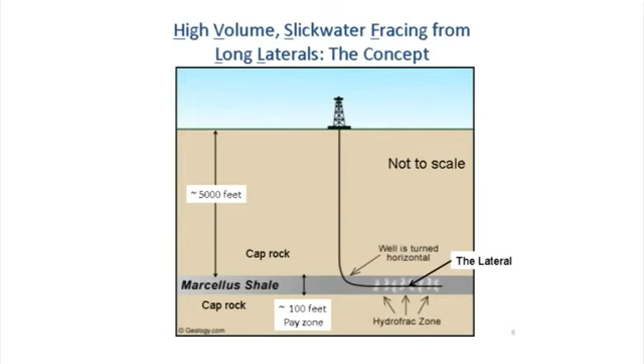The inventory is where you have your product. The product of a gas operator is gas. The inventory is everywhere, therefore you have to go everywhere to get it. Got that? So you can see why directional drilling is important because of the geology. The shale layer is thin, and because of the way nature put the gas in the shale, it's everywhere.

Go back to the second technology: high frac fluid volumes. Conventional gas wells typically use less than 100,000 gallons of fracturing fluid. Now, for those of you who don't know anything about fracturing, you might think 100,000 is a big number, but as we proceed tonight, you're going to see 100,000 is a very small number, unless it's the amount of money in your checking account. So high volume in New York State is defined as anything over 300,000 gallons.

And as you'll see later in the talk, typically for unconventional shale wells, we're talking millions of gallons of frac fluid. Why? Well, because we can drill through a mile and a half, or 2 miles of shale, we have a really long well. The well could be 3 or 4 miles long. Just to get all that fluid down there takes a lot.

Fill up a pipe that's only 6 inches in diameter that's 3 miles long, it still takes a lot of fluid. But you're trying to create and recreate many fractures. Let me show you a picture of what I mean.

Okay, up in New York State we have lots of gorges. You've all heard the phrase 'Ithaca is gorgeous.' Or 'gorges,' which one is it? It's both. If you walk through any of the gorges around Ithaca, you can see exposed shale layers, including black shale layers.

So this is a picture from the bottom of a Taughannock Gorge, and this is a black shale layer. You'll notice those are natural fractures; they're called joints. The geologists would call them joints. They're really fractures that have occurred because of natural geological processes.

Fluid, liquid or gas, does not want to flow through that rock very easily. In fact, it might take a molecule of gas in the middle of that block years to get to the nearest crack or joint. But since it's been down there for 390 million years, a lot of that gas has gotten to those joints. So most of the readily available gas in the Marcellus is not in the Marcellus, it's in the joints in the Marcellus, because that's where it wants to go.

So another misnomer, another myth: hydraulic fracturing is not fracturing, it's refracturing, because there are already fractures. The purpose of hydraulic fracturing is not to create new fractures, it's to open up the existing fractures. Why? Because that's where the gas is.

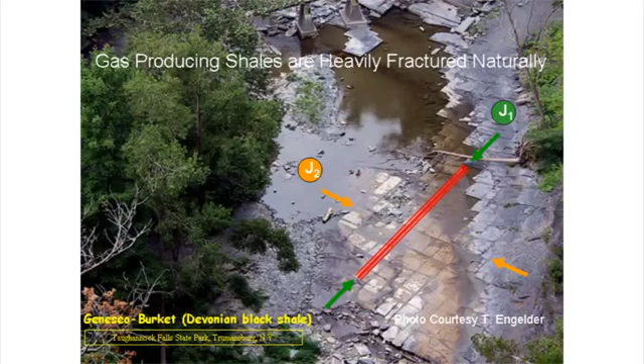Got it? Okay, so why do we need high volumes? Let's put our imaginary 1.5 mile long lateral. How many of these joints are we going to intercept if there's a joint every 2 feet? Thousands of them. And how much fluid do we have to put in those joints to open them up for hundreds of feet in each direction? Even though we're only opening those joints, how much are we opening these joints? Are we creating cracks this wide down there?

This wide? A little bit more than the diameter of a grain of sand. But when you've got acres and acres of cracks open the width of a grain of sand, it takes a lot of fluid. So the second technology that had to be invented was the ability to bring to a site high volumes, to store high volumes on a site, and to inject high volumes.

That takes a hell of a lot of horsepower. Again, there's one of those engineering words, hell of a. Okay, thousands of horsepower of pumps. This is not your pressure washer for your deck, okay?

We're talking thousands of horsepower needed to pump those high frac fluid volumes down 2 or 3 miles along a pipe that ultimately is only the casing, the production casing, the stuff that's down there on the lateral through which the gas is going to flow back. What's the diameter of that pipe? 4 to 6 inches. Okay, so here we go with my favorite analogy.

Garden hose. You connect your garden hose to your faucet. Is the rate at which the water comes out the end of the garden hose the same as the rate at which it comes out of the faucet? Yes or no? No. If you make your hose long enough, what comes out the other end? Nothing. Why? Friction. So there's pressure loss and flow loss as you're trying to force a fluid through a hose, just like there is as you're trying to force a large volume of fluid, millions of gallons, through a 6-inch diameter pipe over 3 miles at what pressure?

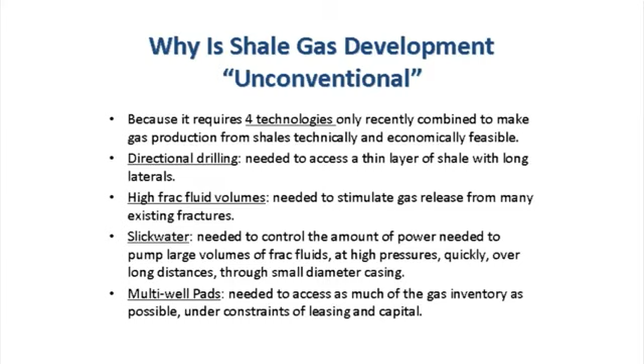Fourth technology, multi-well pads. A pad, as you know, is an area where there is drilling and fracking going on, a number of acres that have been cleared and industrialized.

Conventional wells typically have one well per pad. Why? It's all in the geology and how the gas is stored. Why do you only need one well on a pad? Because it's either down there or it's not. It makes no sense to drill one well here and then move 10 feet away and drill another. You might want to move a mile away because you missed, and you got a dry hole. You thought there was gas down there, but you didn't get it. But where's the gas in the Marcellus?

Everywhere. So if you're going to go through the effort of clearing an area and setting up shop with heavy industrial activity, why not drill another well in that direction, and then move 17 feet and drill another, and another? Do that until economically you say, I've gotten the most out of this one pad, I'll move on to another. So drilling more than one well from a pad is dictated by the geology, the gas being everywhere, and by economics, and controlled by whom?

Gas companies, and DEP, and who's leasing the land? You all. So if a gas company wants to come and put a pad here and drill 8 or 9 wells that way, and 8 or 9 wells that way, that's going to be a pretty big pad, and it's going to take up a lot of land underground. It's going to drain a large area, square miles. And they have to have permission from landowners to do that, or they have to not get permission and still do it, depending upon the laws of the land. It depends whether you're in New York State or Pennsylvania.

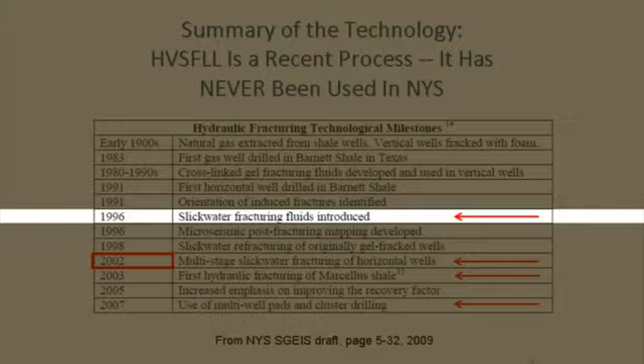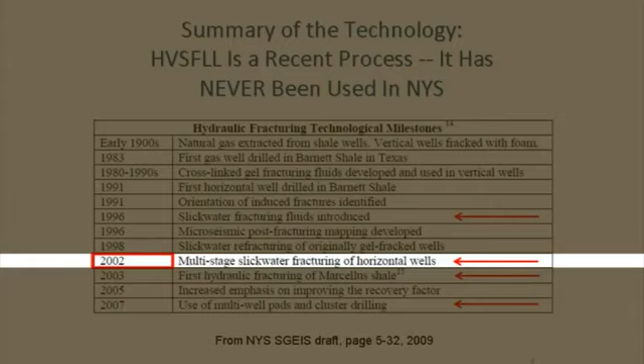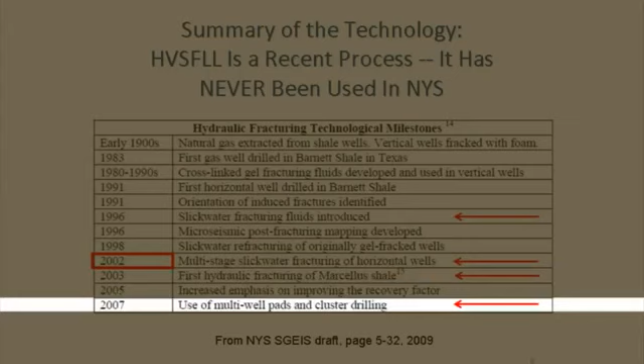Slick water fracturing fluids were introduced in 1996. That's not 1947 - that's a myth. We don't frack Marcellus wells with traditional fracking materials. Gel fracking, gel gas fracking, sometimes hybrid fracking, yes, but usually slick water - not always, but most of the time. Multi-stage slick water fracturing of horizontal wells - combined slick water, high volume, in a horizontal well - came in 2002, down into the Barnett. The first hydraulic fracturing of the Marcellus Shale was in Pennsylvania, 2003, Washington County. And finally, use of multi-well pads and cluster drilling, Pennsylvania, 2007.

So this is all relatively recent. A myth the industry repeats is that we've been doing this for millions of times, over 60 years - what's the hubbub? The hubbub is it's relatively new technology. You're still inventing it, still evolving it. It's still an industrial process that has yet to reach a steady state operating procedure, because every well is going to be different, every formation is going to be different, and capital and leasing control what they do.

This is going to be a constantly evolving technology. This will never be a technology where a building goes into your industrial zone and you build toasters - the same thing over and over again. It's constantly going to evolve because that's what Mother Nature is going to force the industry to do. All these were natural evolutions in response to geology and gas distribution.

Got it? Now we know what we're talking about. Unconventional gas development: large volumes, very large volumes, 100 times more than previously used. Multi-well pads, horizontal drilling, and it's necessary to add different chemicals to the fracturing fluid than used before, because of the requirements of that massive hydraulic fracturing process. That's what the hubbub is about. Now we're all saying, is that new technology safe enough for us? Are the risks acceptable, because it's a new technology?

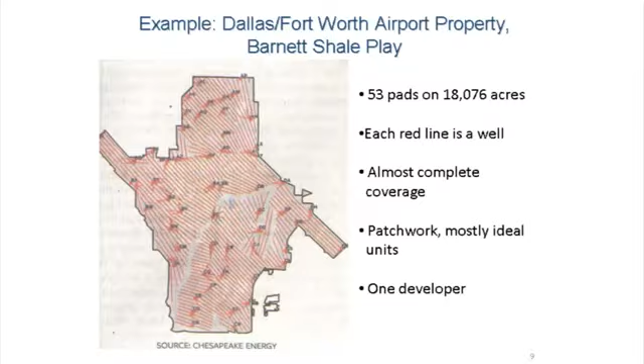I told you a few minutes ago I'm going to show you what the technology is evolving towards, because I'm going to repeat this again and again tonight: the technology is not steady state. There is no standard operating procedure. You won't find a book right now that says how to develop an unconventional gas well in the Marcellus in central Pennsylvania—that book is being written, chapter by chapter, and every well adds another couple pages to each chapter. But the experiments are where the industry looks to see the experience of the future: how can we make this operation work better, how do we get more gas out for fewer dollars down? That's the bottom line—from a corporate point of view, more gas out, fewer dollars down, higher profits. That's good.

This used to be the world's largest frac job, in April of 2010. This year, in April, this was announced as the world's largest frac job. It's in northeastern British Columbia, where there's a big shale field being drilled substantially. Gas is going to be piped to the west coast of Canada, liquefied, and sent by ship across the Pacific to sell to the Far East. Good business—16 wells on that site.

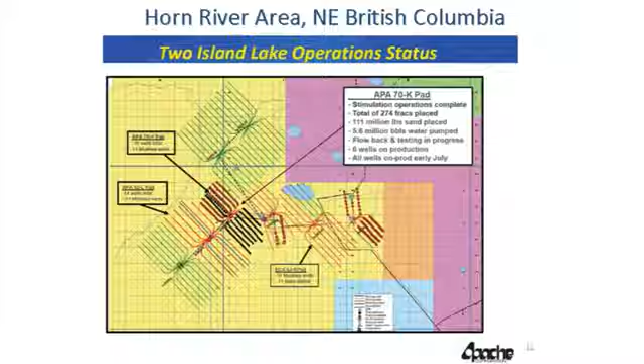Okay, so I'll give you some statistics. Here's that pad right here—there's 8 wells going northwest and 8 wells going southeast. Why do you suppose some wells go northwest and some go southeast? Why didn't they go north-south? Natural fractures—you want those wells to cross the most natural fractures because that optimizes your production. So that tells you the direction they're going.

What controls how far they drill those laterals? Lease controls and economics. It costs a lot more money to drill a 2-mile lateral than a 1-mile lateral, and if you're not producing much gas from that lateral, you might choose not to go 2 miles—or maybe you choose to go 2 miles to produce more gas. It's complex formulas. But look at the numbers.

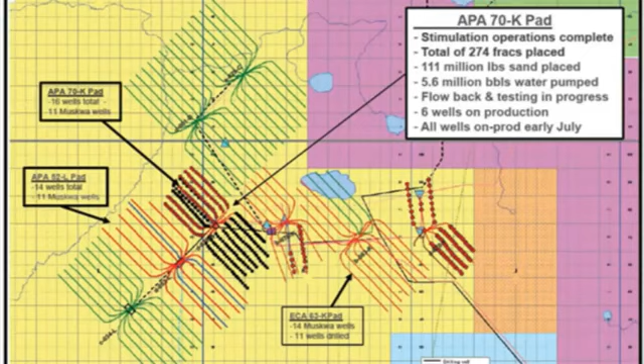To get those 16 wells fracked—every one of those dots is a frac job. You don't fracture the entire lateral at one time; you fracture in intervals, as we'll see in the movie in a few minutes. So there were 274 individual frac jobs involving 111 million pounds of sand and 220 million gallons of water. That was April of this year. November of this year, Encana—that was Apache, by the way.

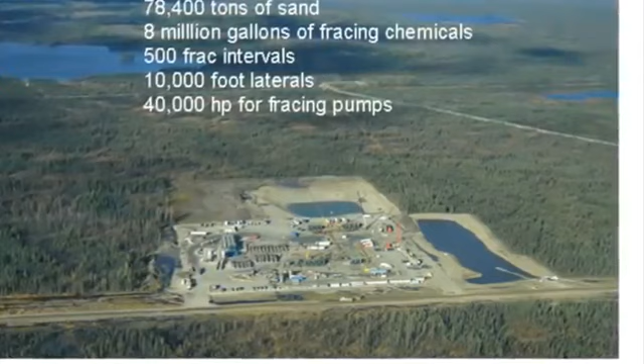In November of this year, Encana bragged on its website and to its shareholders that they now had the largest frac job in the world. Also in northeastern British Columbia. This is a square kilometer. Here's the frac water holding pond, here's the flowback holding pond. 417 million gallons of water, 78,000 tons of sand, 8 million gallons of fracking chemicals, 500 frac intervals, 2-mile-long laterals, and 40,000 horsepower of pumps.

What's another difference between conventional gas and unconventional gas development? You've heard it before. It's heavy industrialization. It took 111 days to complete that frac job - that's a third of a year. 40,000 horsepower running 24/7 during those 111 days. That's a lot of noise and a lot of air and light pollution. And how do you get 78,000 tons of sand to a place?

It's not a sand fairy. It doesn't come by helicopter. It comes by truck. You count the number of truck trips. How do you get 417 million gallons of water to that lake? Truck. Or if you're lucky, if you have another pad nearby, maybe that lake is serving two of them and you've got a pipeline between them, but somewhere you've got to go get the water to put there.

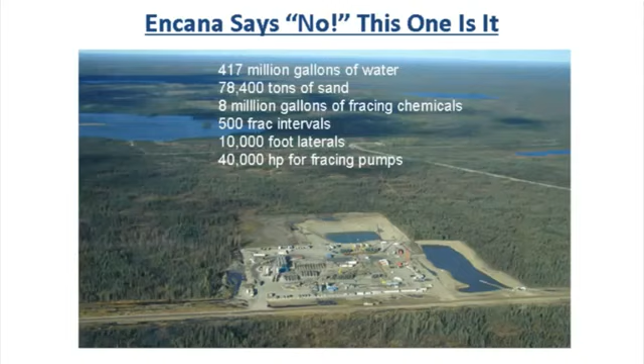So the point I'm making here is another major difference between conventional and unconventional is the amount of time on the site and the industrialization activity on the site and the attendant risks. The risks are higher - I'll make that point again and again tonight. No industrial activity, even building a toaster, is risk-free. What I'm saying is in going from conventional to unconventional, because you're drastically increasing the industrial activity, the quantities of materials that have to come to the site and the quantities of materials that have to be removed from the site, the risks go up. You have to answer the question: is it worth it?

So, to summarize so far - why is this modern kind of thing, slick water, high volume fracking from long laterals, a higher risk to the environment and human health? Simple reasons: it requires much higher well density. I just showed you, your gas is everywhere, put a well everywhere you can - many wells per square mile. It requires much more industrial development over large areas, over a large period of time.

It requires much higher volumes of fracking fluid, millions of gallons per well. It produces much higher volumes of waste fluids and solids containing hazardous materials. What's down there is hazardous material - it's been stored safely down there for over 300 million years. The methane itself is only hazardous if you light it or confine it and set it off. You can drink it, you can breathe it, it ain't going to kill you. But the other stuff that's down there is not good for human health: heavy metals, naturally occurring radioactive materials, chlorides, BTEX materials, and the liquid phases of the natural gas.

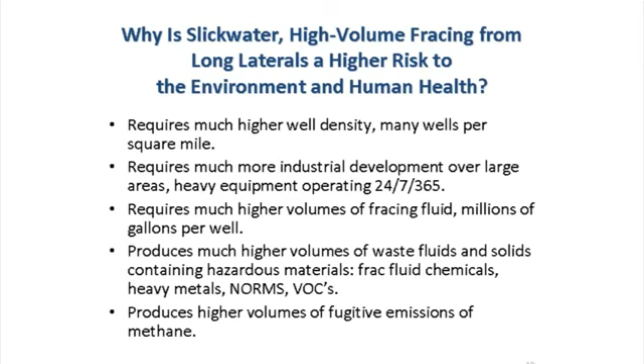It produces much higher volumes of those things, and produces much higher volumes of fugitive emissions of methane. I'll come to that later. Those of you who are concerned about global greenhouse warming and climate change, that's the single most important reason to think twice about drastically increasing the production of natural gas. If you don't want to think that, then ignore that and concentrate on the first couple reasons.

So what does this all mean from a mathematical point of view, a risk assessment point of view? As the number of wells and the volumes of waste increase, the probability of accidental releases of hazardous materials into the air and into the groundwater increases. That's patently obvious to everybody. How many times do you have to roll two dice before snake eyes comes up? Well, the more times you roll, the more probable the snake eyes are going to be.

So if you have 1,000 conventional wells - low volume, low industrialization, low waste - or you have 400,000 unconventional wells in the Marcellus, the odds go up that bad things will happen. Are you willing to accept the risk? Is the reward worth the risk?

Cumulative effects on air and water from these accidental releases and from purposeful emissions into the atmosphere and releases into groundwater are unknown. Who would be crazy enough to purposefully emit into the air or into the groundwater things that we know to be hazardous?

That's not a rhetorical question.

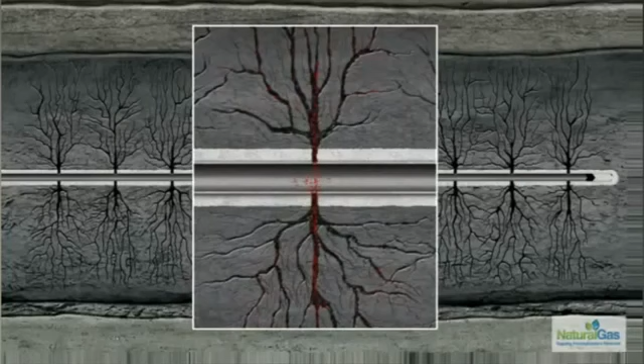That's artist license. That's not what's going on. What's going on, and what they don't show in this movie, is that the shale is already fractured. You saw the images of the fractures? What they're trying to do is force the fluid into those existing fractures. There is some additional fracturing that goes on because they can never perfectly line up every one of those perforations with an existing fracture. They can't do that.

So some fracturing goes on, but as soon as the fracturing that does happen meets a joint, that's a weak plane, and that's where the fluid's going to go. So you don't get this shattering effect like a big explosive going off down there. So that's not quite right.

This might be a sandstone, a shale. This is probably a sandstone or a limestone. They have different properties, and the joints don't necessarily line up. This is the interface between them. So when a crack gets there, it has a bunch of decisions to make. It can stop, or it can go on through, or it can deviate and deflect and then go on through. All those wonderful things can happen. Those are things that do happen.

So the movie is not quite complete. But you get the idea by now? Okay, this is how it works.

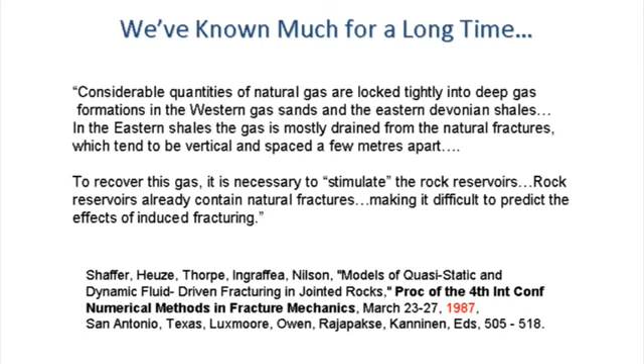That's my point. Okay, I wrote a bunch of papers when I was out there. Here's one from 1987. This is extracted from that paper: 'Considerable quantities of natural gas are locked tightly into the eastern Devonian shales. In those shales, the gas is mostly drained from the natural fractures, which tend to be vertical and spaced a few meters apart. To recover the gas, it is necessary to stimulate the rock reservoirs' — that's using hydraulic fracturing — 'and rock reservoirs already contain natural fractures, and this makes it difficult to predict the effects of induced fracturing.' So we set out on a research program to try to understand what those difficulties were, to quantify them, and see if we could use computer simulation and knowledge of the rock to figure out how best to conquer those problems.

Okay, how many people here have ever done finite element analysis?

Okay, how many people here have ever used a supercomputer? How many people have ever done computer simulation of complex fracturing processes?

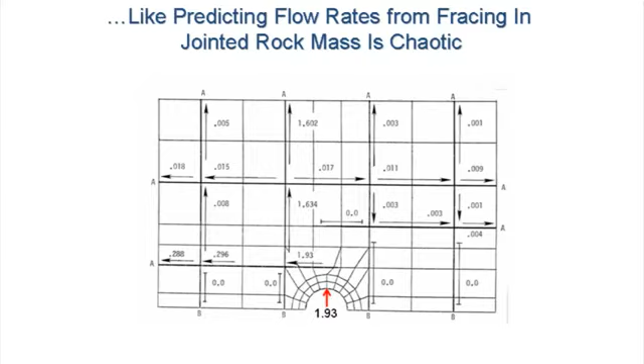I'm really proud of this picture. It's from a 1987 paper, and believe it or not, the computer we used to do the analysis I'm going to describe was at that time the single most powerful computer in the world. It's about as powerful as the computer in my cell phone right now. But anyway, here's the picture.

Here's a well bore. Here's the casing, here's the cement. This is the rock. Every one of those lines is a joint, a pre-existing fracture.

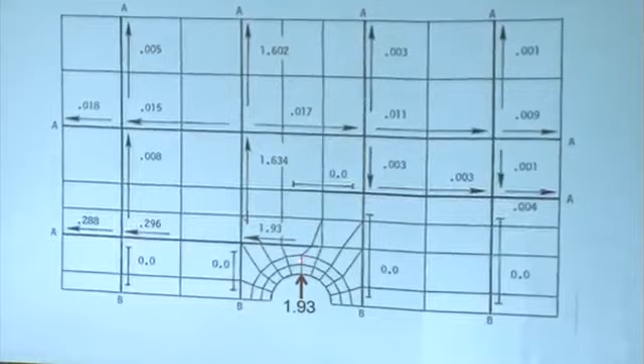We asked the computer, what happens if we inject a certain amount of fluid at this point through a perforation? It goes through the cement, fractures the rock, gets into the first joint, and it has a decision to make. Do I go left or do I go right? Well, it depends upon the pressures and stresses in the rock, the flow characteristics of the joint, the permeability of the rock.

So the computer model says, well, it all went this way, but when it got here, this is Main Street and Elm. It has to decide whether to go left, right, or straight, and some of it went that way, so you get the point.

What we have is a network of flow fields. It's like a traffic pattern. If 100 cars leave this street at this time, where do they wind up, when they all have opportunities to make left turns, right turns, or go straight?

The problem here is that this wound up being an unpredictable problem. We concluded in this paper that it's nonlinear chaos. For those of you who don't know, a characteristic of a nonlinear chaotic problem is this: a slight change in any of the conditions in the problem results in a big change in the answer.

That's not a good position to be in. It makes your computer models virtually useless. They're fun, and you write papers about them, but they're not practical. So we couldn't use this computer model to tell Schlumberger where the fluid was going to go. And that's generally true.

Fast forward 5 years, still working for Schlumberger, but now we're doing actual physical testing. Schlumberger had a computer model that would predict how every one of those perforations would behave. Remember those little perforations you saw in a movie? Each one spawns a crack. Schlumberger's computer model said the cracks should start at this location, at this time, take this shape, and propagate this fast.

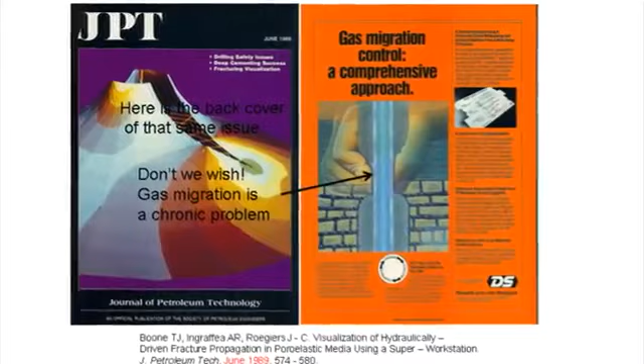Gas migration control, a comprehensive approach. Here's your casing, here's your cement. If you got migration through the cement or along the cement bond line, you call Schlumberger, and they bring out the golden fingers. And they squeeze that cement shut so that the migration is cut off. How's that for humor? Pretty sick, huh?

Anyway, the point I'm making here is this is an old problem, and it will never go away. It is impossible to guarantee in any well, whether it's a water well, conventional gas well, or oil well, that your cement job is ever going to be perfect. There's just too many complexities involved.

Witness what happened in the Gulf of Mexico this summer. That's a multi-billion-dollar well, and they fouled it up big time because they had a faulty cement job for many reasons.

Okay, so that's 1987, 1989. You might be thinking Ingraffea is getting kind of long in the tooth. Maybe he's been out of it too long, and by now they've solved all these problems. I want to convince you that they haven't, but they're still working hard.

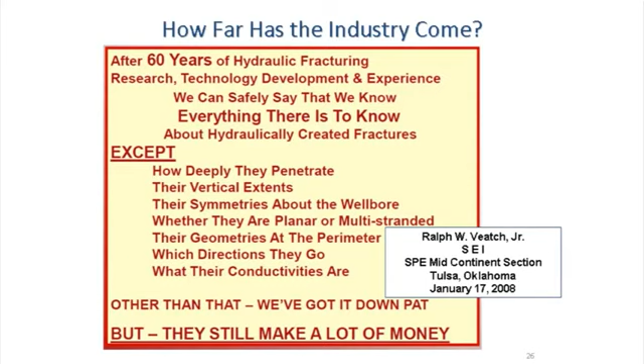So here are a couple quotes from papers. Here's a paper from 2008 by the Society of Petroleum Engineers. This is a well-known guy who works for a well-known company. This is from his paper. I'll let you read it. The point he's making here is after 60 years since 1947, the invention of hydraulic fracturing, we still don't really know exactly how to control everything or predict everything, but that's to be expected.

Moving fast forward to 2009, another well-known oil and gas industry expert says although our computing tools have improved, the supercomputers are a lot faster now. And if you ever go to a frac site—has anybody here ever been on a frac job?

Okay. You'll notice that there's always going to be one van over in the corner, and inside that van are a bunch of computers and a bunch of people with MS and PhDs. And those computers are connected by satellite connection to Houston, where they have the supercomputers running, and they are running real-time computer simulations of the frac job as they're fracking. That's called prognosis, well prognosis. The idea is to predict what's actually happening down there, and by monitoring what you can at the surface—pressure, flow rate—you figure out whether what your computer model said should happen is actually happening.

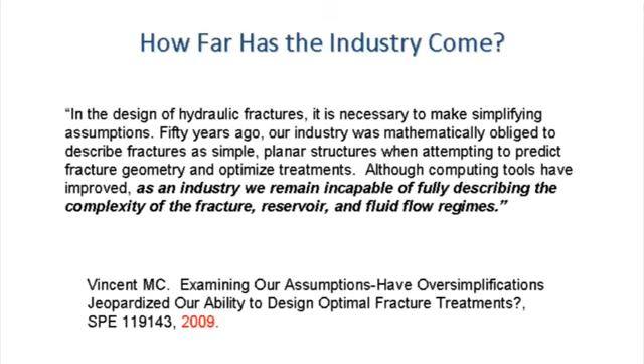So although computing tools have improved, as an industry, we remain incapable of fully describing the complexity of fracture, reservoir, and fluid flow regimes. The point I'm making here, over and over again, beating the proverbial dead horse, is that we don't know everything. The industry doesn't have complete control over what they're doing.

They're working in a natural environment that is not inside of a building in an industrial zone. They're working thousands of feet underground where they can't see what they're doing, hear what they're doing, taste what they're doing, touch what they're doing, or smell what they're doing. They rely on models that are imperfect. The models are imperfect, and the information they feed into the models is imperfect. Will it get better? Yeah, they get smarter.

All right. How big an activity is this going to be and why? We're talking quantities of gas, quantities of money, number of wells, number of pads. What impact can you expect over the next 10, 20, 30 years in Pennsylvania? In your county, you have, I think, 14 permits and 2 wells drilled so far. Okay, so be prepared.

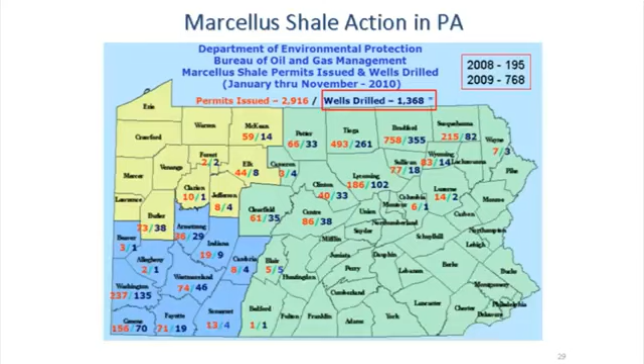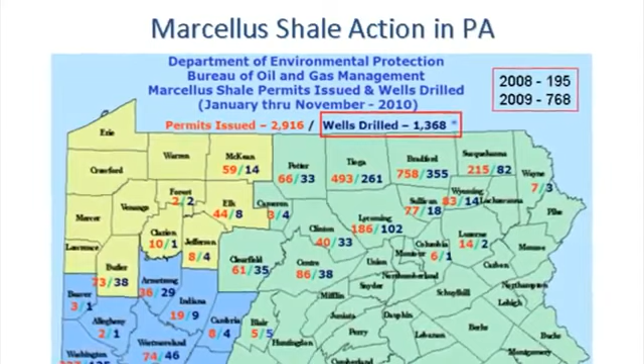This year, through November, 1,368 Marcellus wells were drilled. Is the rate increasing? Well, yes. In 2008, there were 195 drilled. In 2009, there were 768 drilled. By this year, we will have doubled that.

And the industry articles that I read say if capital permits it, and the price of gas goes back up, you'll see something like 3,000 wells per year being drilled and maybe completed in Pennsylvania. So that's the temporal impact—something between 2,000 and 3,000 wells per year over the whole state.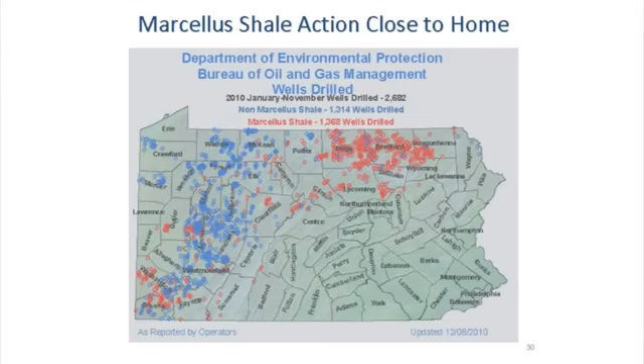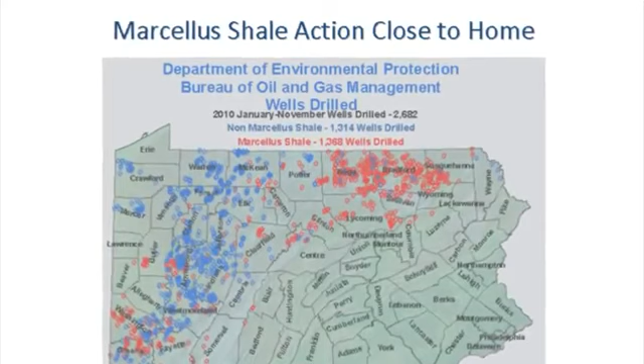Closer to home, you got two wells that were drilled in your county, north and west of here. Why all these wells? There must be something down there the gas companies want. Sure, gas. Where is it? Everywhere in the Marcellus. How do we get it? Drill as many wells as you can. How many wells can you drill? Depends upon what the people who are leasing your land say you can do, and depends upon how much capital you can bring to the job.

Average cost of drilling and completing a Marcellus well in Pennsylvania is $4.5 million.

Okay, so if they drilled 1,300 wells this year, and each one costs $4.5 million, how much capital is that? We're talking $6 billion, and the companies don't have that sitting in their back pockets. They have to go to Wall Street and beg. You've got to borrow to get that capital here.

So somebody has to make a judgment in the front office. Are we going to make a profit? It's going to cost us $4.5 million to drill that well. We got to go borrow that money, got to pay the interest on it. Are we going to make a profit? Depends upon how much gas we can get out of a well.

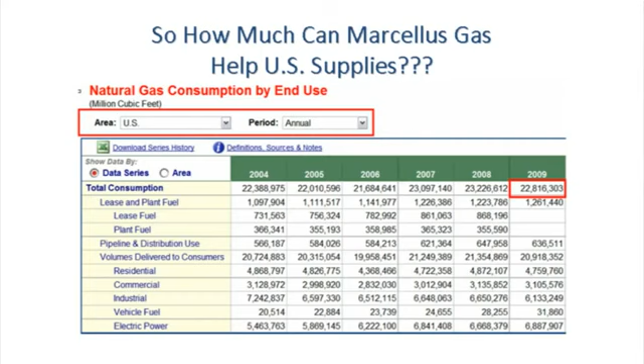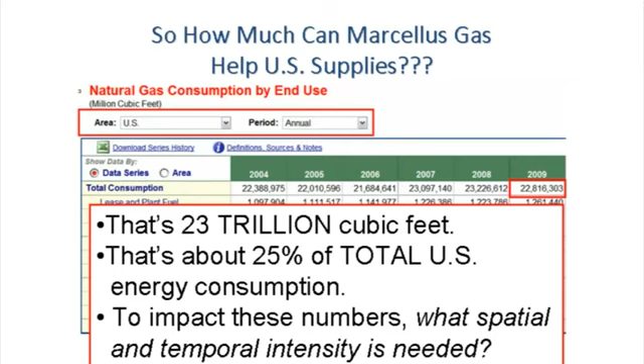Okay, so what number are we looking at here? This is the total amount of gas that was consumed, natural gas, in the United States last year—23 trillion cubic feet. So it will be worthwhile as a natural resource to continue to develop the Marcellus if we can produce safely enough for everybody in the room, and if we can produce an amount of gas that's significant compared to that number.

All right, so how are we going to do that? Well, this guy did it. He's a colleague of mine, Terry Engelder, professor at Penn State. Anybody know him? Okay, oh come on. My co-author. Okay, I'll take it. Boo.

So he's the father of the Marcellus. He's written more papers and books and book chapters on Eastern Devonian shales and joint systems than anybody else. And he did an analysis, which I'm going to go through here for a minute, showing how he is able to predict and calculate, based on modeling—not on experience, but on models—how much gas could be produced from Pennsylvania, from how many wells, over what period of time.

And if you don't have that information and you're the CEO of Chesapeake, you're putting your shareholders at risk. You've got to be able to do those calculations. Is this going to be worthwhile from a financial point of view? From a landowner's point of view, how many people here are willing to admit that they've leased? Okay, from a landowner's point of view, you need these numbers that I'm about to show you.

All right, graphs—you're all experts in graphs. Horizontal axis is age of a well. Vertical axis is the amount of gas per day being produced from that well. This is data from Chesapeake for an average Marcellus well that Chesapeake developed in Pennsylvania. This is information they send to their shareholders. Okay? This is called a decline curve.

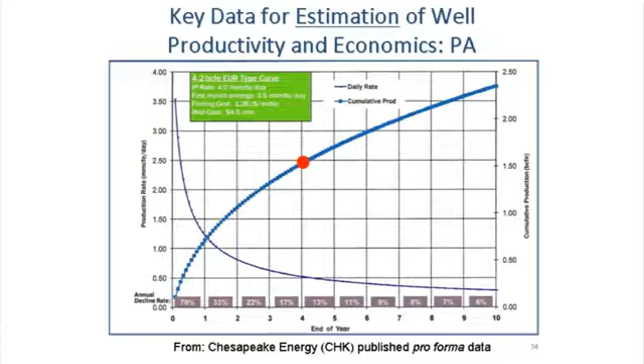The oldest producing Marcellus well in the state of Pennsylvania is about right here. Everything after that is pure speculation. So be careful. If each well were to produce something like 4.2 billion cubic feet over its lifetime, how many wells would it take to get, say, 70% of the gas out of Pennsylvania? And then how much would it be worth? Those are all very easy calculations to do once you have those numbers. So let me show you the numbers.

Professor Engelder did this. Pennsylvania, 25 counties overlying the Marcellus, 21,000 square miles. All good engineers and scientists like Professor Engelder will never say anything is true. They always talk in terms of probabilities. So this P50 means there's a 50% probability that I'm right, and a 50% probability I'm wrong.

50-50. He says there's a 50% probability that my model says that over 5 years, those 25 counties would produce 89 trillion cubic feet of natural gas, which is 3 times the US consumption per year. So in 5 years, Pennsylvania could conceivably produce 3 years of natural gas supply for the entire United States if the model is correct. But you have to read the fine print too.

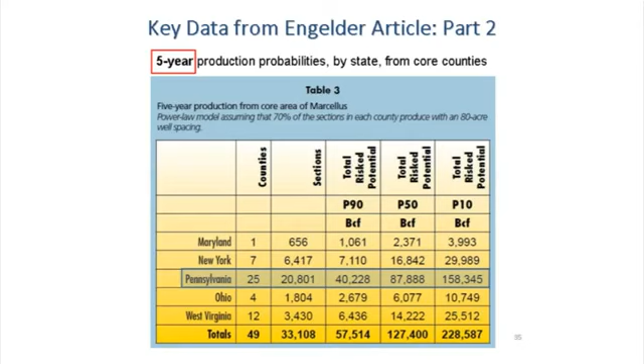Fine print's important. For these numbers to be used, you have to read the fine print, which says this assumes that 70% of every square mile in each of these counties gets drilled, and each square mile gets drilled with 8 wells.

Remember the picture of the Dallas-Fort Worth Airport? If you want that much gas, you've got to drill 20,000 times 0.7 is 14,000, times 8. 8 times 14 is 112,000 wells in 5 years.

Can Pennsylvania drill 112,000 wells in 5 years? I just showed you data. They can barely get 2,000 wells per year. So what's the probability that in 5 years Pennsylvania can solve the nation's natural gas problem?

No. Another myth. I'm not saying the gas isn't there. What I'm talking about now is temporal intensity. You can't get that much gas out in that period of time because there's not enough capital in the world to bring enough big rigs and frac jobs to the state of Pennsylvania, and there aren't enough intelligent, educated well workers to drill 112,000 wells in 5 years.

So these are interesting numbers, but you've got to take them with a grain of salt. You can project 50 years, but no one knows if the Marcellus well will produce for 50 years. The oldest Marcellus well is 4.5 years old. So maybe they'll produce economically for 10 years, 20 years, 30 years — we don't know.

But if you take the model of Professor Engelder, over 50 years, Pennsylvania, now with all 42 counties producing, 32,000 square miles multiplied by 0.7 is 21,000, times 8, is 170,000 wells. So over 50 years, can Pennsylvania drill 170,000 wells? Yeah — that's about 2,000 to 2,500 wells per year.

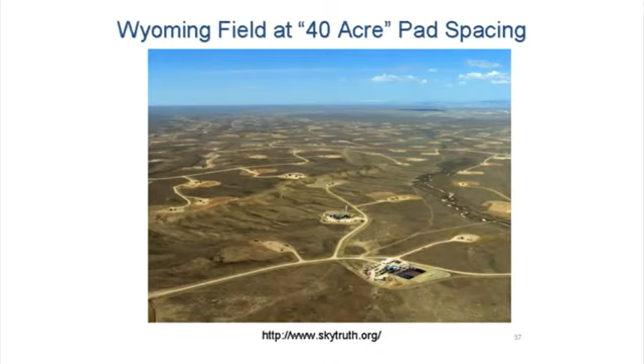This is 40-acre spacing, which is necessary for the geology in tight gas sands. This is not shale — this is Wyoming.

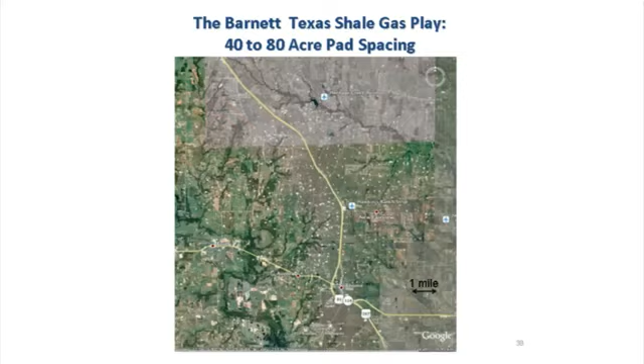This started out as 40-acre spacing, went up to 80-acre spacing as they were experimenting in the Barnett from the early 1990s to early in this century. They were exploring and realizing they could go to longer laterals. Longer laterals means longer spacing between pads — fewer pads, more wells per pad, bigger spacing. So this is closer to what's actually happening in Pennsylvania.

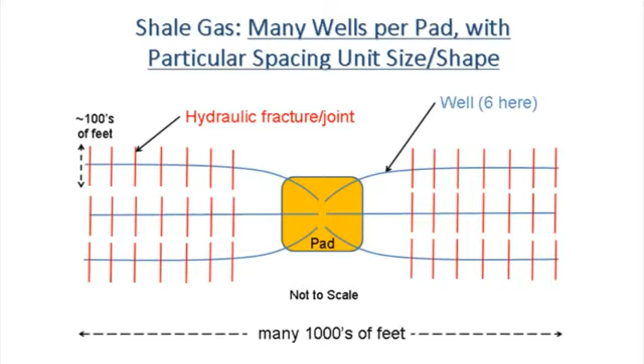The idea here is one pad, multiple wells, making sure the wells go perpendicular to the major joint sets — so the geology tells you which direction to go. You always have some wells going one direction, the rest going the opposite direction, and the orientation is dictated by the orientation of the joints down there.

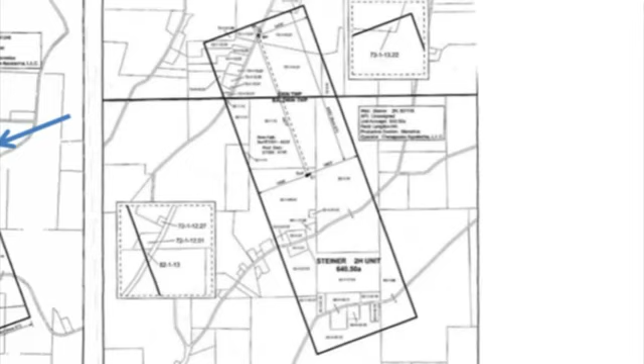And here are actual maps taken from applications for permits in New York State. Chesapeake Company asks the New York State DEC, your version of DEP, for the right to declare this a spacing unit — an area agreed upon by three parties: the gas operator, the New York State DEC, and the landowners who control 60% of the land in that area.

In New York State, the law currently is: if you can get the people who own 60% of the land in a spacing unit, then that spacing unit can be agreed upon by the state and the operator as an area in which wells can be drilled. The other 40% don't have to agree — that's called compulsory integration. It's written into the Bill of Rights.

The Bill of Oil and Gas Rights.

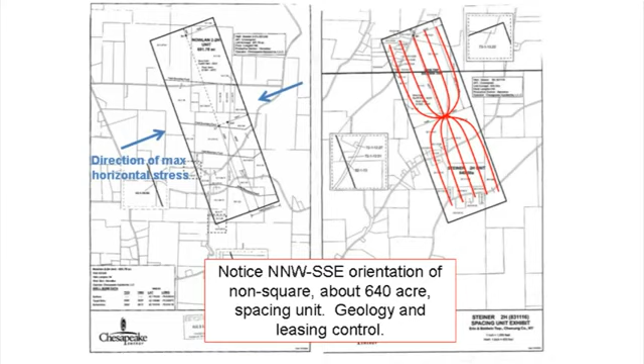So the idea here is they would put a pad right here, and in this case they wanted to drill 5 wells north-northwest and 5 wells south-southeast. If this were a situation where Chesapeake controlled large areas with no competition, and 60% of the land was controlled by landowners who really wanted to work with that company, then they would put another spacing unit here, and another one here, and another one here, and it would look like that.

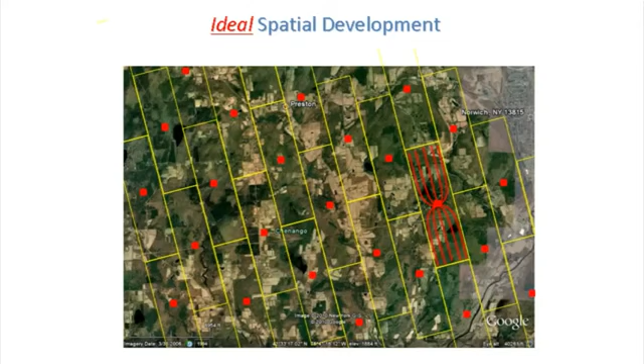That's the ideal, just like the Dallas-Fort Worth Airport. Each one of those red squares would be a pad, and we'd have wells going. This would be the area around New York, near where I live, where all the permits are for wells going north, northwest, south, southeast. Whether that's going to happen or not depends upon you, the people who own the land. If they don't agree to that, then it can't happen.

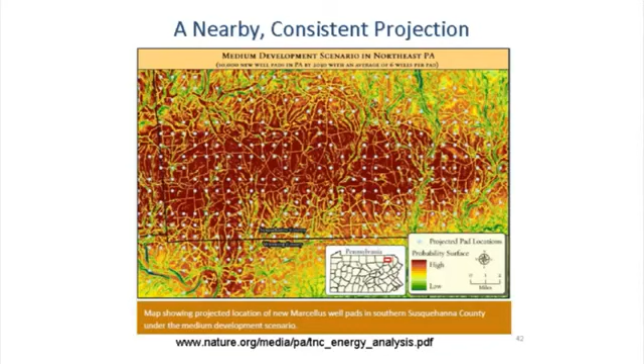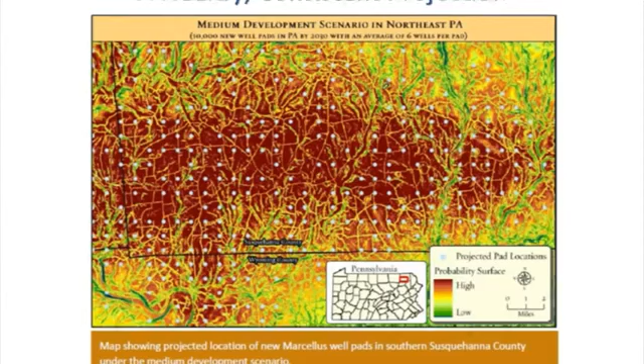This is a recent study you should all go read. It was done by the Nature Conservancy in collaboration with the state of Pennsylvania's DEP, and with a large number of gas operators. They got everybody around the table and said, let's do our best at forecasting high, medium, and low scenarios. What might Pennsylvania look like in 30 years? So go read that report.

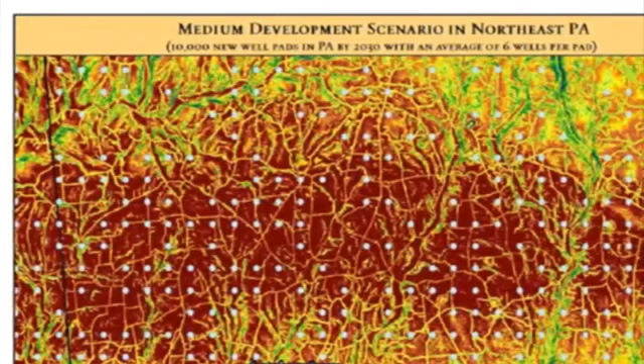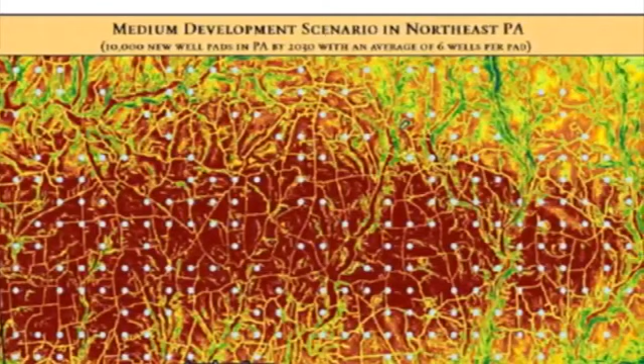It's online, publicly available. This is what they predict under medium development: 10,000 well pads in Pennsylvania in 20 years, with an average of 6 wells per pad. That's what they call their medium scenario. The high scenario has a lot more wells and a lot more pads, but this is what the pad distribution would look like in southern Susquehanna County and northern Wyoming County. Each one of those would be a pad. So that's a prediction made by industry people working in collaboration with your DEP and the Nature Conservancy to try to give you a view of what things would look like.

All right, what can go wrong? From above and from below. What can go wrong from below? Lots of myths here.

Certainly, there's the possibility that gas, drilling fluid, and brine can migrate up through the well structure—the casing and the cement. It's a human-made structure, and it's imperfect. Cement jobs can fail; they can be faulty to begin with, or they can fail later on in life. Casing can corrode, and casing can burst if there happens to be a void in the cement job over a sufficiently long length of the casing. You're putting 10,000 psi of fluid pressure in a casing that's a quarter-inch wall thickness and 6 inches in diameter—that's 200,000 pounds per square inch. That bursts the casing. This can happen. So lots of things can happen from below, along the well string.

Shallow, medium, and deep. Dimock is a relatively shallow example—within the first 2,000 or 3,000 feet, things badly went wrong with the drill string.

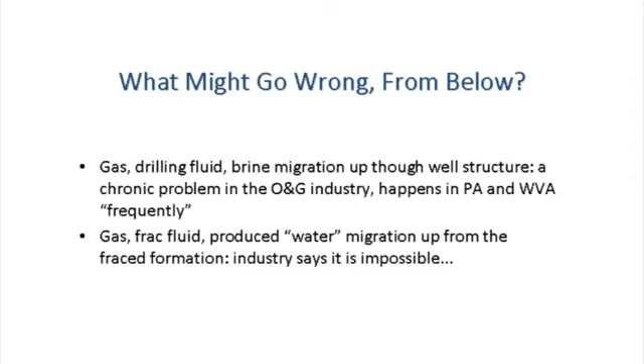If you've got 120,000 wells in Pennsylvania, it might happen once or twice. The consequences could be severe, or the consequences might be mild. So you get migration up into the groundwater and a dozen families lose their groundwater, or you get migration into the groundwater in an aquifer that's serving a whole community.

So we don't know—where are the models? The model I showed you from 1984 on the supercomputer... I've been scanning the SPE database recently. Who is doing modern supercomputer-based simulation of 5,000 feet of different layers of rock with different joint formations and properties, injecting fluid down at 10,000 psi, 500,000 gallons at a time, and asking what's the probability that it can find its way up? The industry can do that. They could do it tomorrow. They probably have.

That's what the EPA is trying to figure out right now with their ongoing study. We're going to have to do it ourselves, or hopefully some gas company, or Schlumberger, is going to come up and say we already did it, here are the answers, here are the probabilities. They just tell us, we wouldn't have to do the work again. And then we can put that one to bed as a low probability event.

The things that can go wrong with cement jobs—this is from the Alberta Energy Utilities Board, again up in Canada. You've heard a lot of this from the Dimock situation. You can have migration along the contact between the cement and the rock. You can have migration along the contact between the cement and the casing. That's loss of bond. You can have diffusion of fluids through inaccurately made cement.

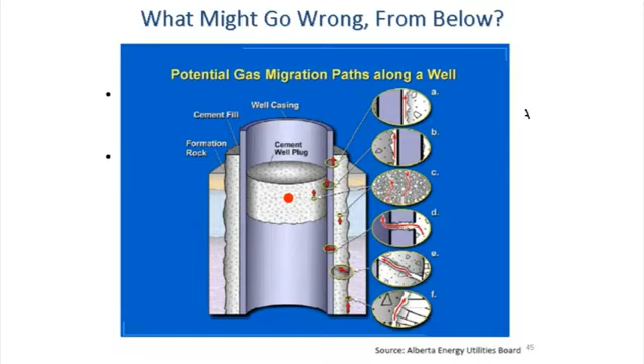You can have fracture of the cement that leads to debonding. You can have rupture of the casing. You can have the cement well plug, which is put in the well after drilling but before the fracturing process to shut in the well—that plug can fail. These are all things that can go wrong and have gone wrong in Alberta and British Columbia. That's why this picture was created, to warn companies that these are the things that can go wrong. We're going to be inspecting for these things—fix the problems.

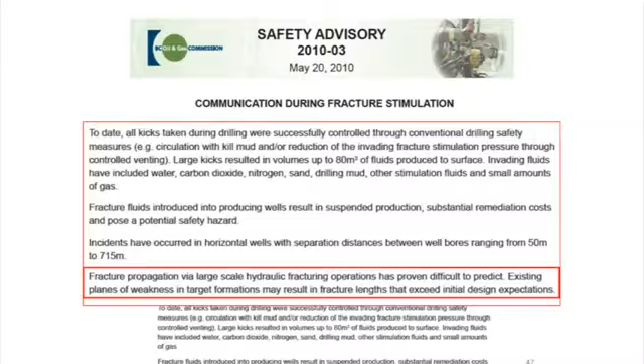Back to British Columbia, a safety advisory from earlier this year: communication during fracture stimulation. This is also stuff that can go wrong down below. And by communication here, they did not mean that Halliburton called Schlumberger. By communication here, they mean that during the drilling of one well, fracturing was occurring in a well that they thought was too far away to have any influence, and it wasn't. That's called communication. While you're drilling this well and fracturing this well, you don't want the 10,000 psi, 500,000 gallons of fracturing fluid that you're pumping in here to come out there.

Could this happen? It has happened. 5 incidents of fracture stimulation resulting in communication with an adjacent well during drilling. 3 incidents of drilling into a hydraulic fracture formed during a previous stimulation on an adjacent well and containing high pressure fluids. 10 incidents of fracture stimulations communicating into adjacent producing wells, and so on.

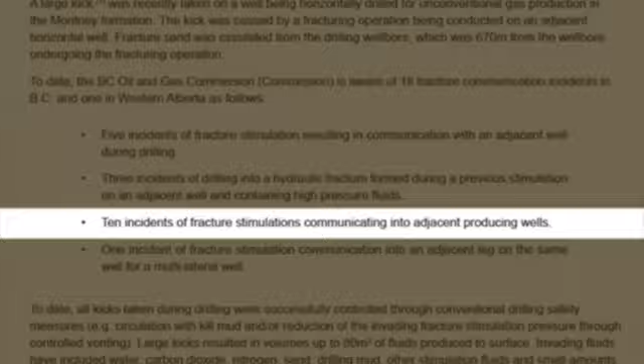Bottom line here is fracture propagation. Do you remember the quote from the article I co-wrote in 1987? It's very difficult to predict in a highly fractured formation what the fracturing effects are going to be. This is 2010: fracture propagation by way of large-scale hydraulic fracturing operations has proven difficult to predict. Existing planes of weakness in target formations may result in fracture lengths that exceed initial design expectations. Surprise.

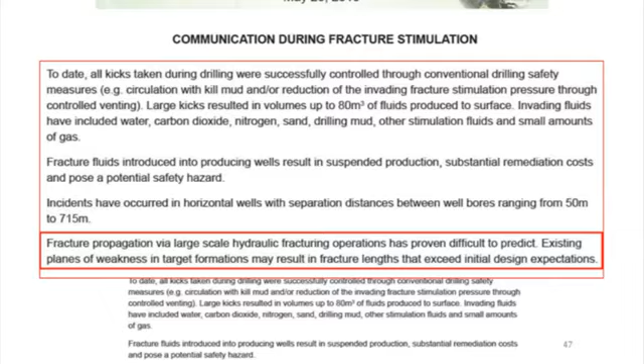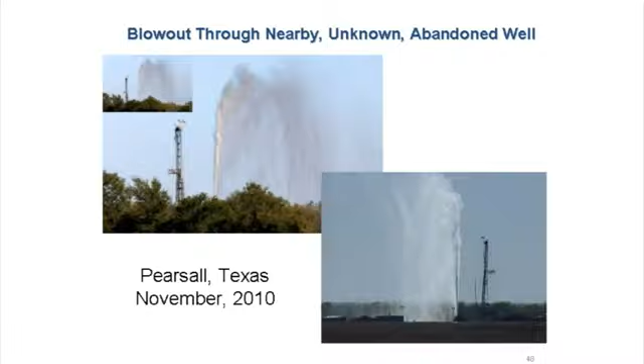I still haven't found the answer to the question I asked last week. I know this was going on for at least a week. And so, the main problem here was this was a sour well—there was hydrogen sulfide gas. And so they had to evacuate an area and put people up in motels until they fixed this problem.

The point I'm making here is that if you have a large number of abandoned wells and you don't know where they are, and if you haven't done proper seismic investigation of the area that you're going to drill and frack, it is possible that you will drill into or frack into an area where there's a pre-existing abandoned well, which is a pipeline to the surface. And that's what happened here. So be careful.

What might go wrong from above? This is what I'm concerned about. The farther up you come, the less you rely on Mother Nature for protection, and the more you rely on people for protection. When there's 5 or 10,000 feet of rock between you and what's down there, I feel a lot more comfortable than when there's just a driver with an 8,000 gallon truck of frac fluid. That's a human driving a human machine.

Bad things can happen at higher rates. So spills, ruptures, seepage—drilling fluids, frac chemicals, flowback fluids, which people sometimes call produced water, go where they do not belong. This happens, in my opinion, too frequently in Pennsylvania. And we'll talk about frequency in a minute. There's always going to be airborne emissions.

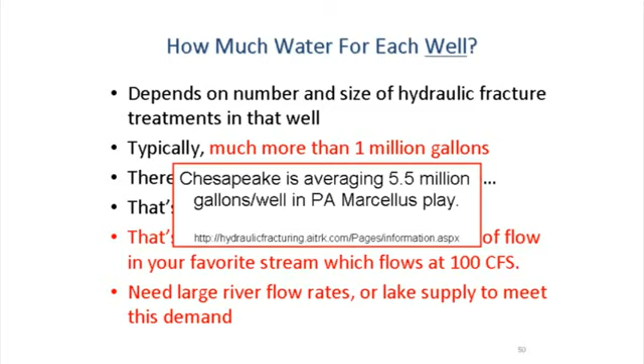I don't concern myself yet about how much water needs to be withdrawn from the Susquehanna, the Delaware, or the Monongahela. I'm going to be very concerned when they come to Cayuga Lake - that's where I live. I was being sarcastic there, but that's a real problem, getting enough water to do the frac jobs. We're lucky, we live in an area like British Columbia where there's usually plenty of water. But one always has to be mindful of where you're taking it from, that you're not having a detrimental environmental impact on the animal life in that stream.

What goes down the well? Lots of myths again. Myth: 596 separate chemicals are added to that witch's brew during hydraulic fracturing. False. Over the history of hydraulic fracturing in the United States, at least 500 to 600 chemicals have been identified as having been used in one or more fracture jobs. That's different than saying in any one fracture job in Pennsylvania tomorrow, 596 chemicals will be used. That's not true. Well then, Professor, how many chemicals will be used?

It depends. Depends on the company that's drilling the well and fracking it. Depends upon the geometry, depends upon the geology, depends upon what kind of fracking process they're using. Is it a traditional gel frac? Is it a gel plus foam frac? Is it a slick water frac? Is it a hybrid frac? Or any combination of the above?

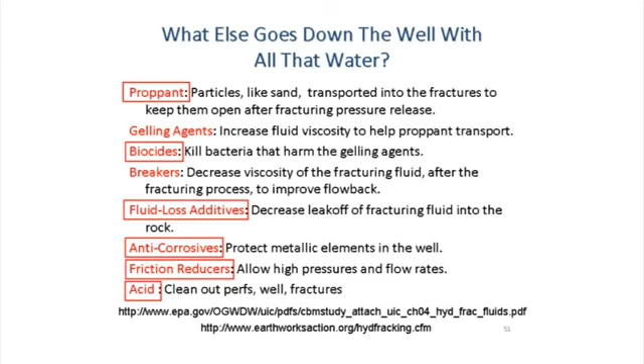So for a slick water frac, these are the absolutely necessary chemicals. There has to be water. There has to be proppant, usually sand, but not always sand, something to hold the cracks open. There has to be a biocide to kill the bacteria. There has to be a fluid loss additive. There has to be an anti-corrosive. And of course, there has to be a friction reducer, otherwise you don't have slick water. And there has to be an acid.

Those are the bare minimum. So you can go on, say, the Halliburton website that came up last week, where they're now saying we're not going to tell the EPA what we're using, but we're telling you, the American people.

Sometimes I just don't understand public relations vice presidents at gas and oil companies. If they just did the simple thing, it would make it simple. So they tell EPA to stuff it, and then they come up with a website that says the American people can judge for themselves what kind of chemicals we're using. And so you can go to the Halliburton website tonight, and they'll tell you, here are the MSDSs for all the chemicals and all of the kinds of frac jobs we do, which is fine.

That's a step forward. But be careful, an MSDS doesn't tell you everything you need to know. Read the fine print on the MSDS, whether it's for the chemicals under your sink or the chemicals in your frac fluid. Having an MSDS doesn't say it's not hazardous - it just describes the hazards up to the point that the research has been done on them.

And most MSDSs, where it says known hazards - blank. Hazardous material, known hazards - blank. Because of the hundreds or thousands of chemicals that we use in our everyday jobs and in our homes around the country, not just in oil and gas, a very, very small percentage of those chemicals have ever been tested for the wide variety of bad things they can do to you. So I'm not just warning you about oil and gas, I'm warning you about all this stuff in your environment. Be careful.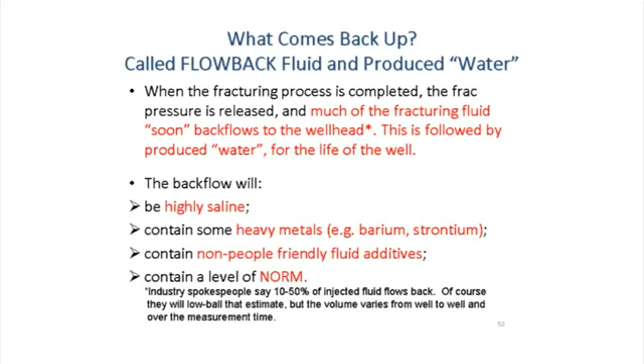Okay, what comes back up? Well, partly the stuff that you put down there, but not all of it. As you probably know by now, the Marcellus in northeastern Pennsylvania is sweet and dry. Lucky you—imagine you were in southwestern Pennsylvania where it's wet and sour. Okay, sweet and dry means almost pipeline ready; a little bit of dehydration and off it goes to market. But everything you pump down there doesn't come back up immediately.

And here's another myth. I had a Chesapeake vice president tell me to my face—I was here, he was here—and I said, so how much of this stuff comes back up? And he said 11.819%.

Okay, I'm an engineering professor. The first thing we teach our students in freshman year is significant figures. You can't possibly have a number like 11.819% describing the average amount of fluid that comes back from your jobs. Maybe you could say 11%, okay? But that's what happens when they put MBAs from Harvard out there in public to speak for oil and gas companies. They sometimes preach technical nonsense.

But here's the more important thing. Yes, it is important to know how much comes back up. Why? Because you've got to properly dispose of it. So if you say only 11% comes back as flowback fluid, that means you only have to dispose of 11% of it. But what they don't tell you is that most of it comes back eventually. It has to. Over the life of the well, all wells continue to produce produced water or brine.

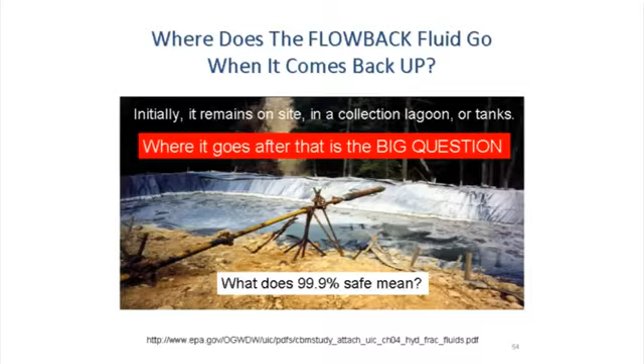When things got started three years ago in Pennsylvania, all the return fluids eventually went into an open lagoon or a large impoundment serving more than one pad. There's been a tendency recently for some companies, not all, to move to tank storage. That's good—the fluids go into the tank.

Where do the gases go? You can't capture the gases. What comes back is not only liquid, it's gas, and that gas can't be stored in the tank. The fluids can—they can settle out, filter, recycle, and reuse. That's all good, but that's relatively recent, and not all companies are using best practices.

So you're starting to tighten up your regulations. Nineteen new pages of regulations were approved for Pennsylvania, Chapter 78. That's good—another hundred pages and you'll be there.

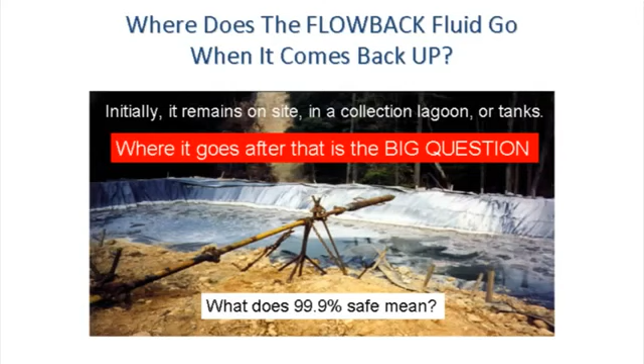All right, getting to the end, because I know you want to go home. How safe is safe? I started off by saying everybody in this room wants to leave here with a better understanding of whether this could potentially hurt me or help me. I made the statement that all this industrial activity taking place over the next few decades here cannot improve your health. Okay, that's off the table.

It might hurt your health, it might hurt your environment, it might hurt your pocketbook, or it can enrich you. You've got to decide whether the risks are worth it.

What is safe enough? Can gas companies produce from Pennsylvania Marcellus wells in a way that is sufficiently safe that it will not harm the environment or human health beyond an acceptable level, that will not change your pattern and style of life beyond an acceptable level, and will not cause undue economic harm beyond an acceptable level? If you know the answers to those questions, let me know.

Those studies are just now starting to be done. Okay, so let's look at some of them.

Professor Engelder, the guy who did the studies at Penn State predicting how much gas and how many wells you have to drill, speaks frequently around Pennsylvania and up in New York—does the same thing I do, but has a somewhat different perspective on things than I do. That's okay. He's encapsulated this whole problem of risk into a very narrow discussion—too narrow for me, but I want to describe it to you.

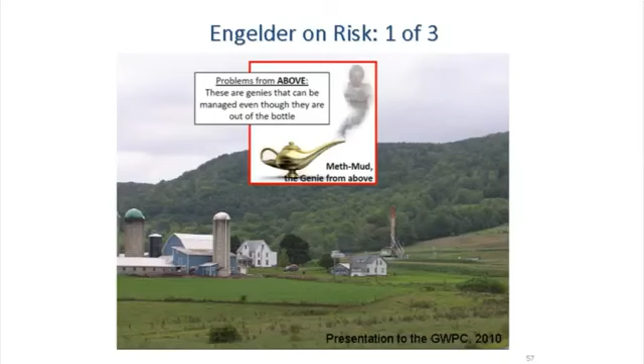He says the major impact on human health and the environment comes from what he calls the meth-mud problem—that's methane migration and mud intrusion into groundwater. Now, he's probably right that that's the most common kind of problem; these are the endemic kinds of problems. But that's not the only kind. He wants to concentrate on those, so let's do that for a while, because we can quantify the risks. He's actually tried to do that.

So these are his slides—three slides, this one, and now this one. He's done some research and concludes there was a significant environmental impact in the state of Pennsylvania during drilling for Marcellus in the period January 2008 to August 2010, one time for every 150 wells drilled. Now, there's something good going on here—this is called quantifying risk.

Uncertainty quantification, that's what engineers call it. You can't make rational decisions about cost-benefit analysis without quantification of risk. What's the downside? If you know the rate of the downside, you associate a cost with that downside, and now you can start doing cost-benefit analysis. You see? Okay, so Professor Engelder has done us a service.

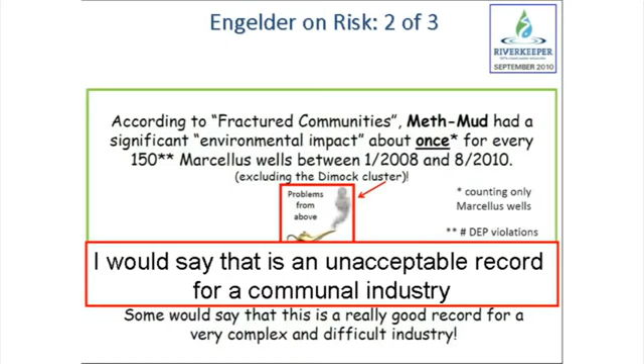He's done some research, and he doesn't want to talk about Dimock. That's off the table—I don't know why. He doesn't want to talk about Dimock. So he thinks there is a serious environmental impact one time for every 150 Marcellus wells, and then he goes on to say that that's a really good record.

Well, I don't agree. I have the right to disagree. I'm an engineer, he's a scientist—he's a structural geologist, I'm a fracture mechanics engineer. So I know about risk and fractures and factors of safety and reliability estimates. So I'm going to try to show you why I think that's a very bad record.

He goes on to say that Pennsylvania DEP has a mission, and it's to provide leadership to the industry to develop even better practices. Now I'm trying to understand what he means by that, so help me here. Does that mean the DEP should have the technology and experts to develop the best practices for the most technologically advanced industry in the world?

I don't think that's what he means, because obviously it's not the mission of the DEP to do research and development for the oil and gas industry. So what does he mean by DEP being leadership? I think what he means is they have to increase the fines. That's leadership, right? You would encourage the industry to develop better practices if you fine them higher. I think that's what he means. I don't know, what do you think he means?

And now he challenges the industry. He wants to improve from one significant environmental impact for every 150 wells, to one for every 500 wells in 2 years. Okay, so run the numbers: 120,000 wells, that's 240 significant environmental impacts.

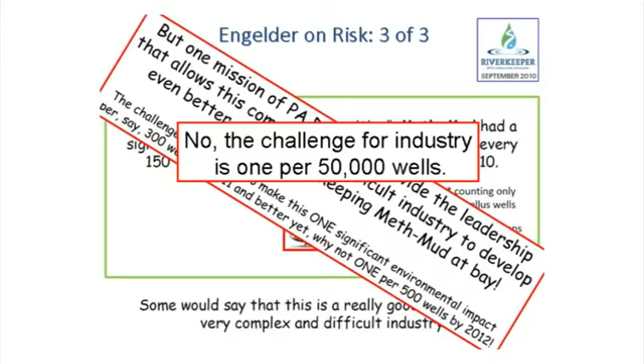So I was giving a talk like this last week, and somebody jumped up, a guy who works for FEMA, and says, 'That's absurd, Professor Ingraffea, it's absurd. The industry could never do that. They can't see what's going on down there, so they can't inspect it, they can't maintain it, so things are going to go wrong.'

Okay, so I also work in the aerospace industry. My undergraduate was aerospace, so half my time has been working in rock mechanics down there, and the other half up there, in aerospace.

So there's a dictum in the aerospace industry: if you can't inspect it, you throw it out after its useful life is expended. Because if you can't inspect and maintain it, you shut it down and start over again. So my response is, if the industry can't tell us that well is going to maintain an acceptable level of safety during its lifetime, shut it in, shut it down, and drill another one. Keep them all young—that's what they do in aerospace.

When you fly on a commercial jet aircraft, you're guaranteed there's a 1 in a million chance you're going to die on it. Federal law says that. I hope now you know that—you should feel safer. You get on a jet airplane, federal law says the manufacturer and maintainer have to guarantee the probability of your dying is 1 in a million. And it turns out to be about 1 in 10 million.

Why? Because they can inspect most of it. But you can't inspect every square inch of every aircraft. So the critical parts that can't be inspected are periodically replaced in order to maintain the risk.

Okay, one last example of why I think the current rate of accidents is unacceptably high. So I'm going to talk about what's called a communal industry. A communal industry is one in which large segments of society participate, either voluntarily or involuntarily. There are two classes of communal industries—I'm going to talk about one of each.

I don't think the acceptable level of risk should be 2 chances in 100 million that you're going to have a blowout—that's asking for too much. This is a man-made system. An unconventional natural gas well is a partly man-made system. So let's do the numbers. This number means 99.999999% safe. That's the reliability index—99 with 6 nines after it.

So those of you who have thought about these things might think that 99.9 is almost virtually true. But 99.9 means there's 1 chance in 1,000 of something being bad. If you have 120,000 wells and you're 99.9% reliable, you got 120 failures. Is that okay? You decide.

I don't think so. But let's take the extreme case, which I do not advocate, just for the purposes of academic exercise. Let's suppose we enforce that same level of engineering and technology reliability on the Marcellus gas play. Professor Engelder estimates there will be 400,000 wells over the entire Marcellus over 50 years. So how many major failures would we expect from 400,000 wells at that level of reliability?

Fewer than 1. We already got by that. We're already at one for every 150 wells. That's 98.5% reliability.

Now, if I were to ask you, is a grade of 98.5 good? You'd say, if my kids get it in high school, yeah. Right? If I was 98.5% certain that I was going to win the New York or Pennsylvania lottery—wow. See the big difference between 98.5 and 99.9? That's the difference between 1 in 1,000 and 1 in 150.

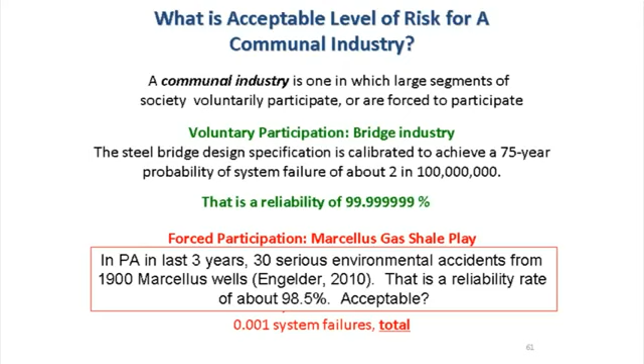When you have small numbers, that doesn't mean very much. But when you roll the dice 100,000 times, it means a lot. There's a big difference between 98.5 and 99.9 and 99.99 and 99.999. You got to make the call.

What's an acceptable level of risk? To do that, you got to see the quantification of the things that can go wrong. We're just now beginning in Pennsylvania to be able to quantify the number of accidents per well, or per truck trip, or per million gallons of frac fluid. That stuff could have been modeled. We don't have to wait for the experience, your experience, to learn those things. They could have been predicted, and they can be predicted into the future, and people should be predicting them.

That's half of the equation. Here is the probability of things going wrong—assign a cost to them. Compare that to the benefit cost. Here's the expense cost, here's the benefit cost. Weigh them. You decide.

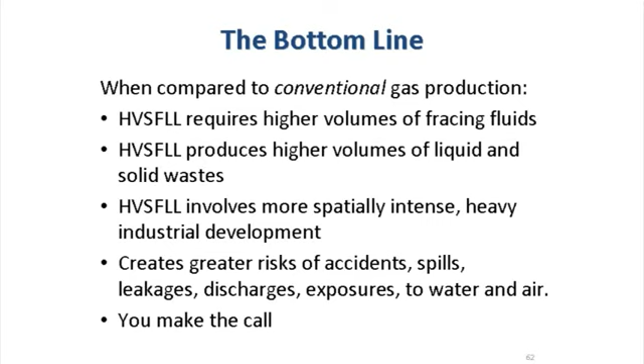So, bottom line, then we can all go home—and we have a lot farther to go home tonight than you do. When compared to conventional gas production, high-volume slick-water hydraulic fracturing from long laterals requires higher volumes of fracking fluids, produces higher volumes of liquid and solid waste, involves more spatially intense heavy industrial development, and creates greater risk of accidents, spills, leakages, discharges, and exposures to water and air. I hope to have proved that to you tonight by way of data, facts, engineering, science, and technology, and a couple of quips.

But ultimately, you get to make the call. So thank you all for all this exorbitant amount of time. I appreciate your coming. Time for Q&A, but think,

act, and if you want to get in touch with me and tell me I said something bad, wrong, irreverent, ignorant, let me know. I'd be glad to try to improve next time around. So thank you all, and I think it's time for Q&A.